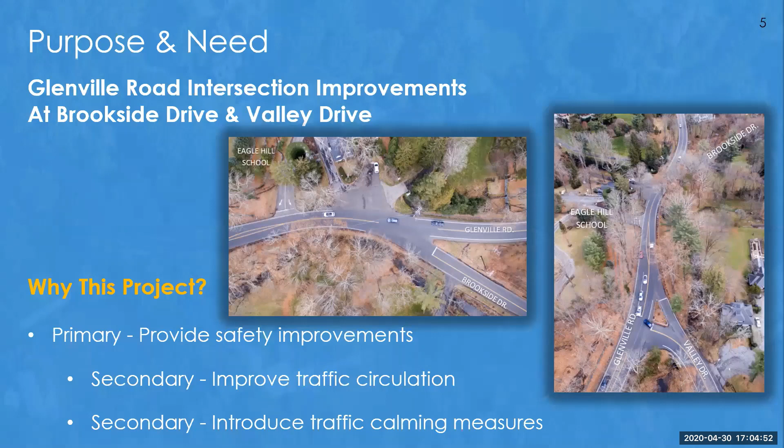There are several other project considerations that I'd like to touch on. While they will not be covered in detail at today's presentation, they will be covered in future presentations. The first being a potential realignment or relocation of Eagle Hill School's driveways to line up with one of the intersections. There is also a potential for a sidewalk leading to Lake Avenue.

There are other flood control initiatives within the project area that will be coordinated with this project. There are subsurface infrastructure and utility relocations and coordination that will have to go on as part of this project. There are environmental permitting procedures and town approvals that will have to be obtained, specifically the town's municipal improvement process and the town's inland wetland and watercourse agency approval process.

There may be some private property impacts for the proposed project. And finally, there are construction approach and sequencing items that will need to be addressed in the future. Again, all of these items, as others, will be addressed throughout the design process.

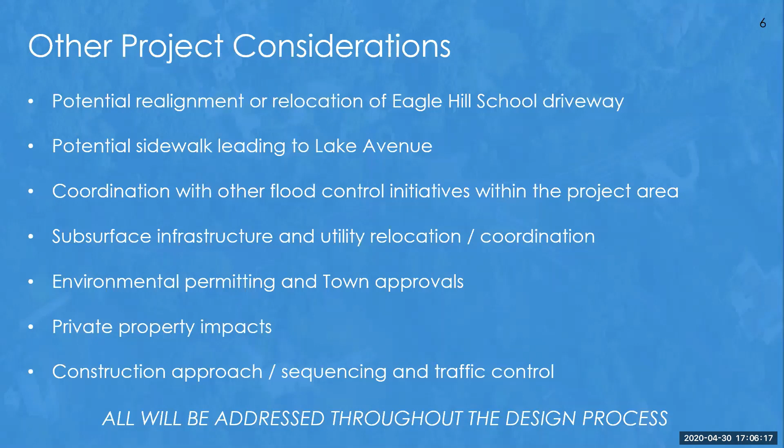At this point, I'd like to hand the presentation over to our design consultants from Stantec Consulting Services. Thank you, Jason. I'm Kent Gannon, project manager and civil engineer at Stantec. As Jason said, we are hired by the town as the consulting engineers for this project. I'll be running through the majority of the presentation with some help from one of my colleagues, Chris Mojica.

You'll hear from Chris a little later as we get into more detail discussing traffic within the project corridor.

Before we really get deeper into the presentation, I think it's important to reiterate some of the points Jason has made. Notably, we are still very early in the project development process. This is what we would consider the first phase, or the feasibility phase, of the project's evolution. So while true, we have studied the project corridor and developed some conceptual design options, which we'll present later, there's still a lot of work and decisions that will be made during any subsequent phases, and especially once we've progressed into the actual detailed design process.

So please keep all that in mind during the presentation, and especially when we open up the public comment portion of tonight's agenda. We certainly do our best to answer all questions, but try as we might, we may not have every answer, or at least every answer in the detail you're looking for at this early stage of the project.

Last point before we move on, please bear with us as well as we make our way through the presentation. I apologize in advance if I skip too many slides by accident or my mouse makes too many appearances on your screen. I think we're all adapting to a new way of doing things, and especially when it comes to presenting these types of projects to the public. So with that said, let's jump back into the project.

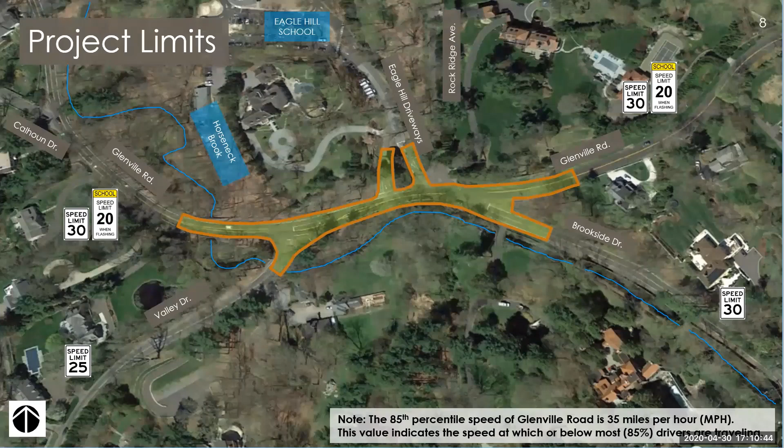We also have speed data available for Glenville Road, and the data tells us the 85th percentile speed for the road is 35 miles per hour. The 85th percentile speed is a typical value referenced and often used in engineering studies, indicating the speed at which 85% of drivers are at or below. So along Glenville Road, it can be expected that 85% of vehicles are traveling at or below 35 miles per hour.

Now that we've given a brief overview of the project corridor limits, here's a look at the three intersections we focused our traffic analysis on when evaluating improvements. These three intersections will be discussed and referenced in the next few slides, and again once we get further into the presentation with more detail regarding improvement options and traffic operations.

Reading off the intersections from west to east, left to right on your screen: we have Glenville Road at Valley Drive, Glenville Road at the Eagle Hill School driveway, and Glenville Road at Brookside Drive.

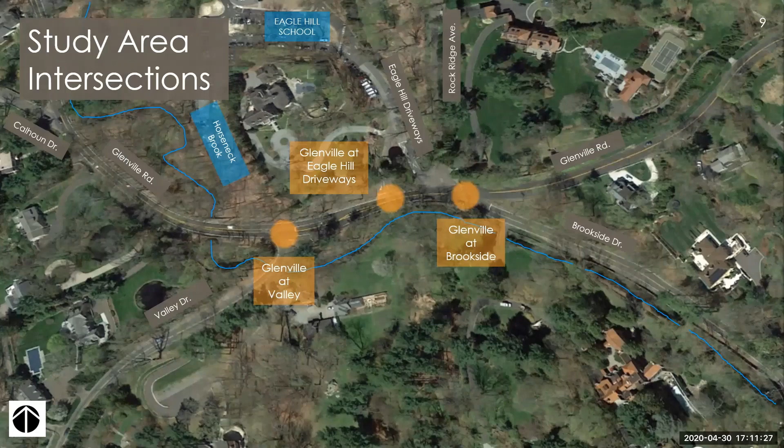The next few slides will further focus on existing conditions and feature the conditions of the existing intersections I listed previously. We'll work our way through the corridor west to east with a couple of existing conditions photographs for each. I'm sure most of you are familiar with this project area, but hopefully this will help jog your memory if needed.

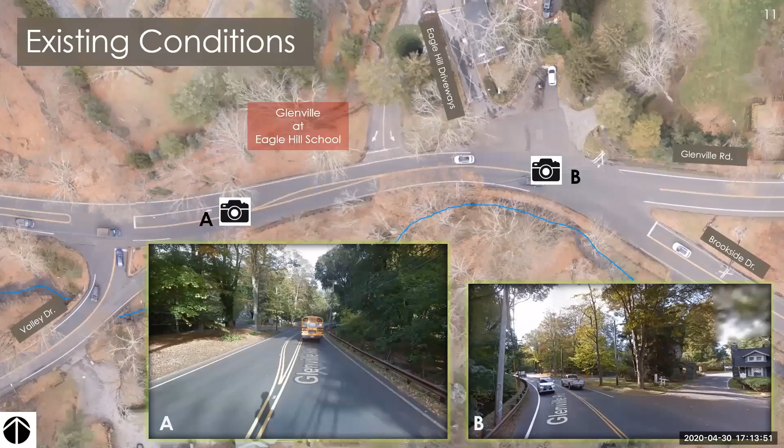The background aerial on this slide also gives a nice focus picture of the study area with turn lanes, stop bars, driveways, and the road striping clearly visible.

Now we've gotten into the crash history along Glenville Road with this slide. Jason mentioned earlier that providing safety improvements was one of the primary goals of the project. Therefore, this slide is important to give a quick glimpse into the crash history between 2016 and 2018, the latest 3-year window that crash data is available. So again, this does not represent any crashes during 2019, but this is the best data we have on hand.

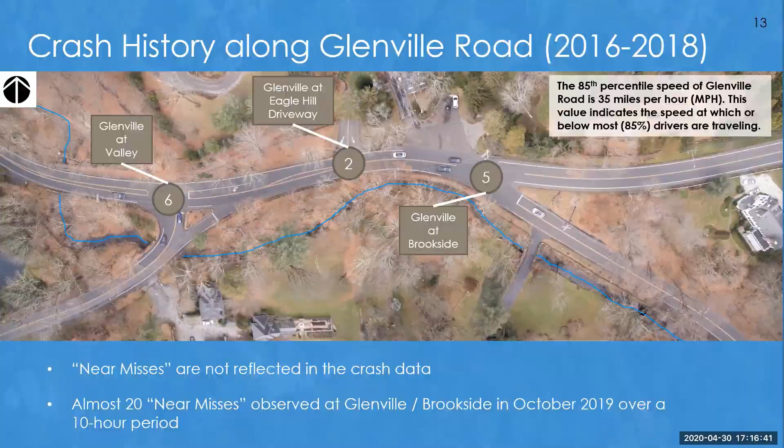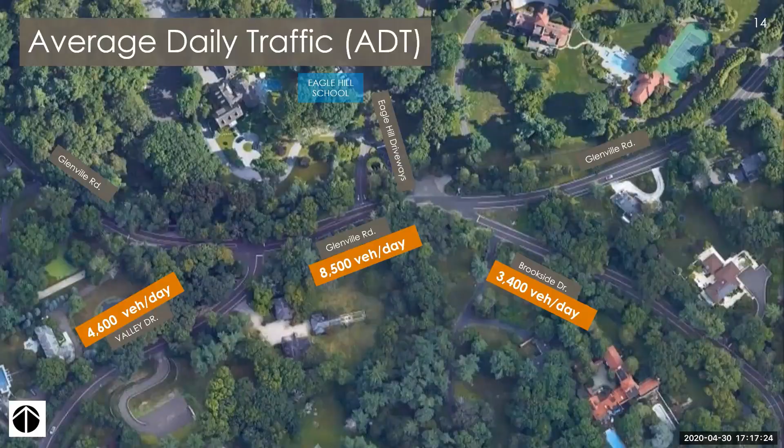It's worth noting we also evaluated a no-build option, which will be reviewed when we get into the traffic operations portion of the presentation. The no-build is also used as a basis of comparison when we evaluate the proposed improvements in a number of categories. So just quickly reading off the options.

Option 1: realignment and reconfiguration of Brookside Drive at Glenville Road. Option 2: signalization at Valley Drive and Brookside Drive intersections. Option 3: roundabouts at Valley Drive and Brookside Drive intersections. And finally, option 4: realignment of Brookside Drive at Glenville Road and a roundabout at Valley Drive. We also refer to this as the hybrid of option 1 and option 3, and I think when we show the plan, you'll see why it's referred to this way.

So option 1, this is the realignment reconfiguration of Brookside Drive at Glenville Road. Option 1 focused mainly on improvements at the Brookside Drive and Glenville Road intersection, mainly the changes tied to teeing up the Brookside Drive approach to Glenville to remove the dramatic skew currently present.

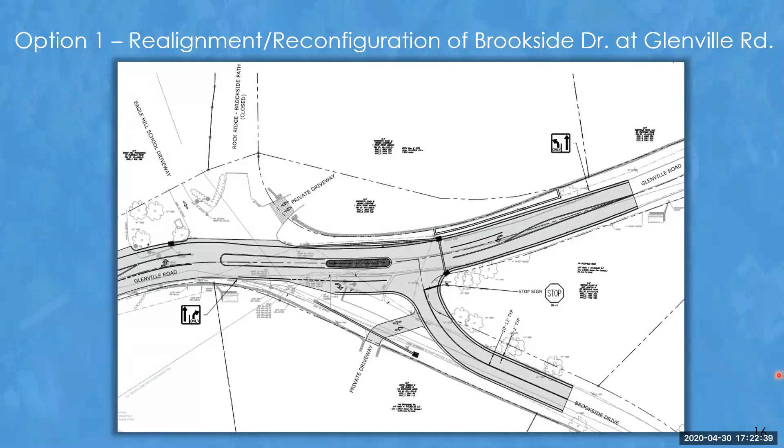The next option we want to discuss is signalization. This second option evaluated traffic operations at the study intersection when placing traffic signals at both the Valley and Brookside intersections with Glenville.

With this approach, the Valley Drive intersection geometry would be mostly unchanged, with the improvements mainly consisting of new traffic signal equipment and minor striping. However, we would anticipate realigning the Brookside junction at Glenville to create more traditional signalized intersection geometry, very similar to option 1, only with a traffic signal versus a T intersection with stop control.

Something I'd like to mention here as well is that we didn't just decide to throw traffic signals in as an option, run through a simulation, and see what happens on the back end. There is an engineered approach to evaluating intersections and whether signals are warranted.

So we completed that study, and the analysis did determine that signals are warranted at both the Brookside and Valley intersections with Glenville Road. With that said, even if signals are justified by a warrant analysis, it doesn't always mean it's the best option for that location, as the installation of a signal may actually result in increased vehicular delay or even increases in certain crash types, such as rear end collisions.

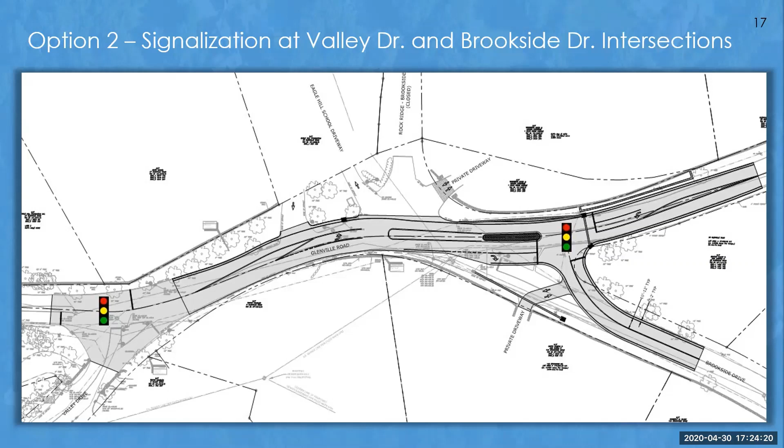Now onto option 3. This is the roundabout at Valley Drive and Brookside Drive intersections. This third option transforms the way both the Valley and Brookside Drive intersections operate. This option would replace both existing unsignalized intersections with roundabouts.

Each roundabout would be 3-legged and designed to fit within the existing right-of-way area, with the goal of eliminating the private property impacts that might be present with the other options, and also reutilizing as much of the current pavement structure and infrastructure as possible. As with all options, we anticipate the installation of new catch basins and manholes as necessary to collect stormwater runoff and tie into the existing storm sewer network.

These roundabouts would be designed to Connecticut DOT and FHWA standards, with a fire truck and school bus as the design vehicle. In other words, the roundabouts, while not very large, would still allow emergency vehicles and school buses to effectively operate and maneuver through the intersection.

This style of intersection also provides a yield, entry, low speed, free flowing approach, and when designed properly, can help provide a measure of traffic calming through the roadway corridor.

In addition, the roundabout can also provide opportunities for gateway or other aesthetic improvements, and these can be added to the roundabout's central island. We don't have any landscape improvements shown in this conceptual design, but these central islands can be landscaped if that's something that's desired.

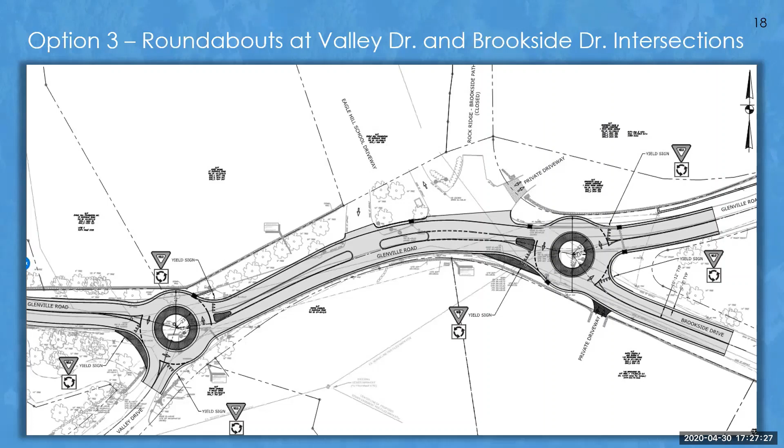And for those of you who would like to see an in-town example, an existing roundabout at the intersection of Havemeyer Lane and Northridge Road is shown here. This is a good example of a roundabout with a comparable size and layout to some degree for what you could expect at the two intersections within our project corridor.

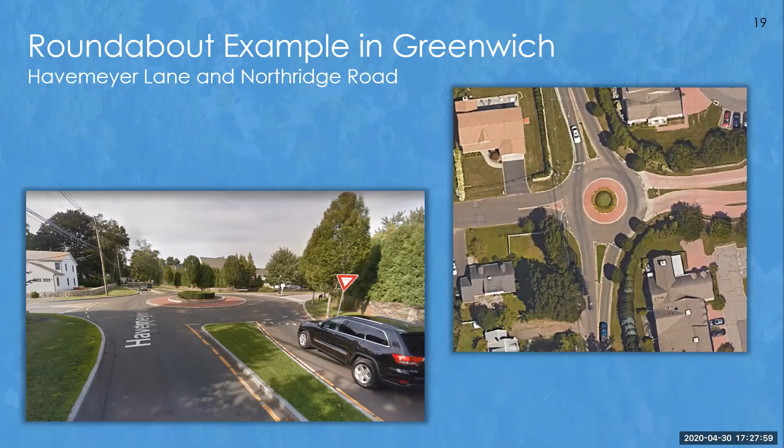The last option we evaluated is what we refer to as the hybrid option. This option takes portions of option 1 and option 3 to create a fourth hybrid approach. The option has the realignment of Brookside Drive at Glenville Road, first shown in option 1, and it also has the roundabout at Valley Drive and Glenville Road presented in option 3. All the previous points discussed with option 1 and 3 still hold true for this hybrid option.

The option provides traffic calming, gives opportunities for green infrastructure and/or landscape additions, but may also require some grading and earthwork, utility relocations, and right-of-way acquisition to accommodate the changes at the Brookside Drive approach to Glenville Road.

One of the things I neglected to mention in the other options is the extra space, or lane width, or median area, if you call it that, created around the Eagle Hill School entrances. That's really this area here. The options, either through the addition of a turn lane or the implementation of a roundabout, create this extra space in this median type area, which can be used as either a turn lane or refuge space for vehicles turning into the Eagle Hill School entrance. This is beneficial as it allows a continued flow of traffic eastbound through the project corridor.

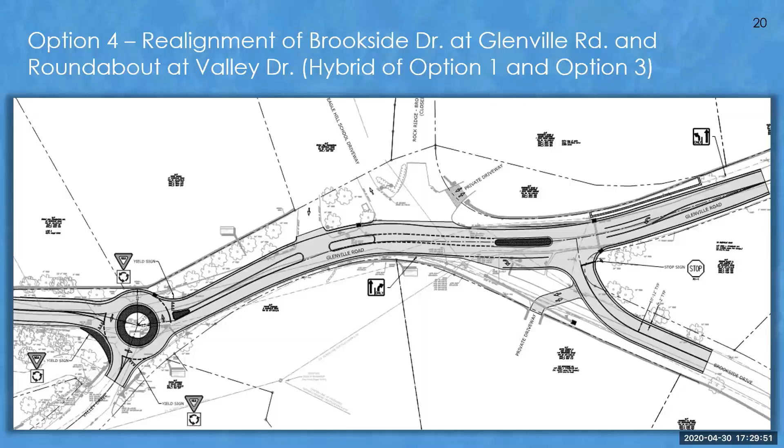I'm pretty sure I hit upon everything I wanted to talk about. So at this point, I'm going to turn it over to my colleague, Chris Mojica, and he'll discuss how we evaluated the traffic impact of each of these discussed options. Take it away, Chris, if you're ready.

Sure, thanks, Kent. I want to spend a few minutes just talking about traffic operations, and this discussion's slightly different in that Kent really focused on, from a traffic perspective, a lot of the safety issues. He touched upon the fact that the 85th percentile speed, the speed at which most drivers are traveling, is 35 miles an hour, which is above the posted speed limits of the area. He talked about the crash history, but I really want to spend a few minutes just focusing solely on the overall traffic operations. The goal here, we know, Jason mentioned that the purpose of the project is really to improve safety, but we really just want to assure that we are maintaining traffic operations, or improving where possible, as part of these safety improvements. From a traffic perspective, we did look at existing conditions, and Kent mentioned we looked at data from October 2019, and I'll go through that a little bit in a second.

From an evaluation perspective, because this is a design project, we're looking ahead into the future, specifically 20 years into the future, into the year 2039. The reason we're doing that is to be sure that anything we decide to do, if we move ahead with any of these improvement options, the operations and safety hold true for another 20 years. We don't want to put something in now that won't work in 5 to 10 years - it's not a useful investment.

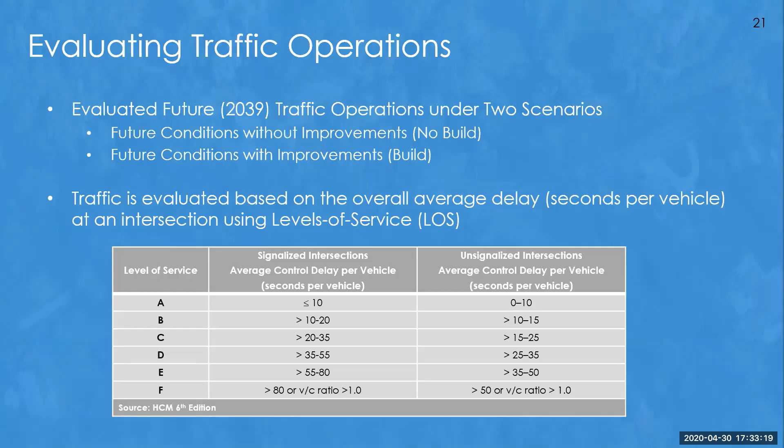One thing I want to note is there was a police officer at the Eagle Hill School driveway intersection for about 20 minutes in the afternoon. The traffic results here don't incorporate the presence of a police officer, because the traffic modeling can't replicate an officer maintaining traffic flow at the intersection. When you have an officer there, they have full autonomy to decide how traffic will flow - they can hold up Glenville Road for 2 to 3 minutes, or hold up the Eagle Hill School driveway for 2 to 3 minutes at their discretion, and that's not something we can really model. So the results here just take into account the traffic volumes handled during this period, and that's what we'll use as the benchmark to evaluate conditions as we move ahead.

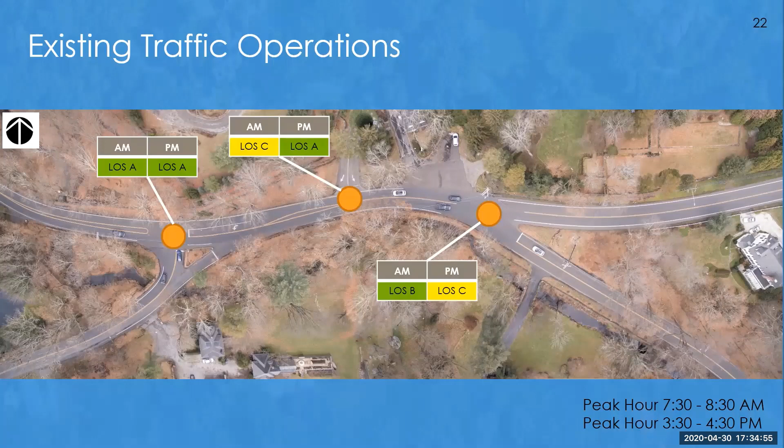Go to the next slide.

So when we say growth, we're assuming a total of 10% growth over a 20-year period, just to give you an idea. That's based on recommended guidance for traffic growth in the area.

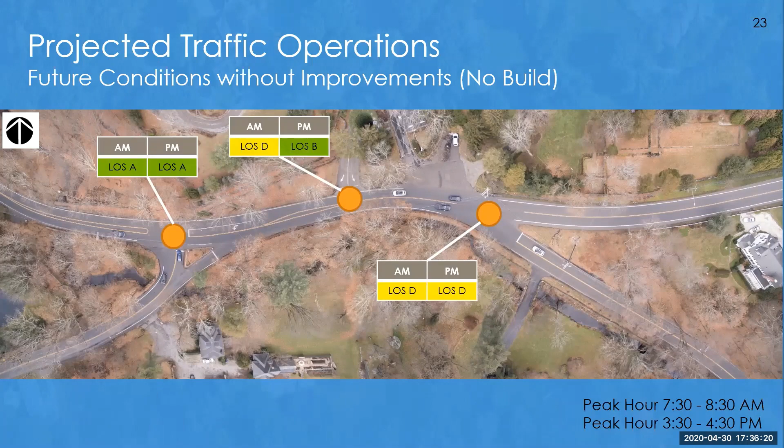...and the afternoon peak hour, we looked at the traffic operations for all of the different options. So we have what we call the no build, or do nothing, scenario, and then each of the 4 options that Kent walked you through a few minutes ago.

Just to recap: option 1 is reconfiguring the T intersection at Brookside and Glenville. Option 2 is adding signals at Glenville, Brookside, and Valley. Option 3 is providing roundabouts along Glenville, at Brookside and Valley. Option 4 is the hybrid concept Kent talked about, where we provide a roundabout along Glenville at Valley, and also reconfigure the T intersection along Glenville Road at Brookside.

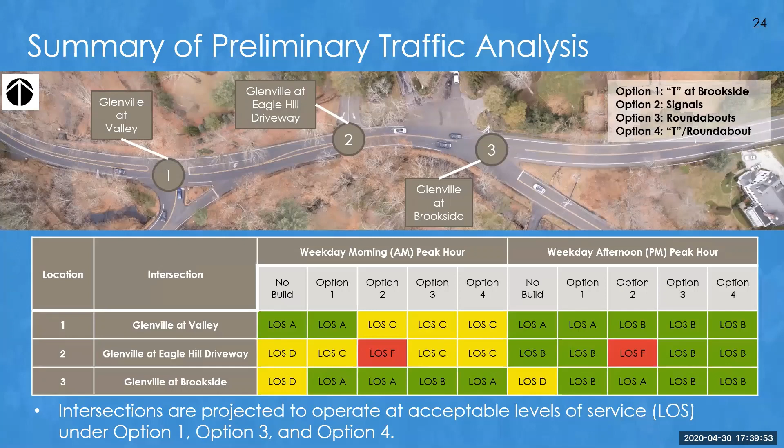Yes, yes, good, good. Well, I heard a moment ago from my neighbors, the Bennetts, who said they've been here for 35 years, and I've been here about 35 also. Hi there, we haven't seen each other for 25 years, but it's fun to be meeting here today.

I kind of lean in favor of what they said, which is I think roundabouts can be really engaging, a nice, pleasant way to encounter changes in the roadway. I also think the roundabout suggested down by the new entryway for Eagle Hill School could reduce a lot of the traffic that happens right now at the current entryway, which is really horrendous and impacts us pretty directly. So I like the sound of all of this stuff.

The one query I have is that right now, if you imagine coming into Eagle Hill School, there's a little stone coach house that you pass, but right in front of that coach house there's perhaps a 30 by 200 foot unused paved rectangle. Sometimes the police stand there just watching people going past, but it's never seemed a very functional use of space. I wonder, would this have any impact on that strange little dead zone of paved highway?

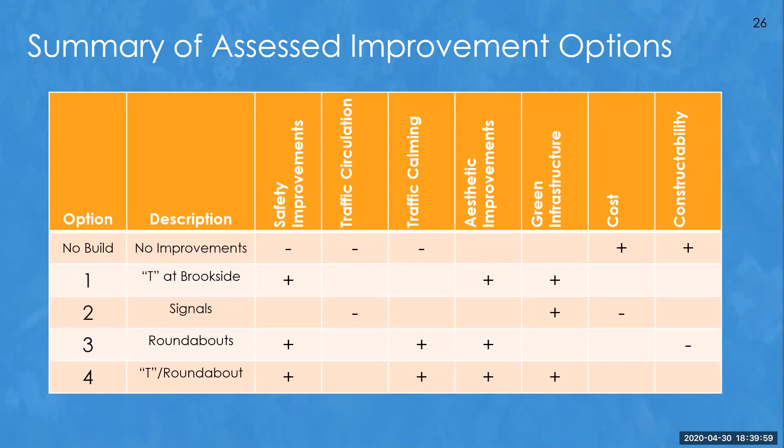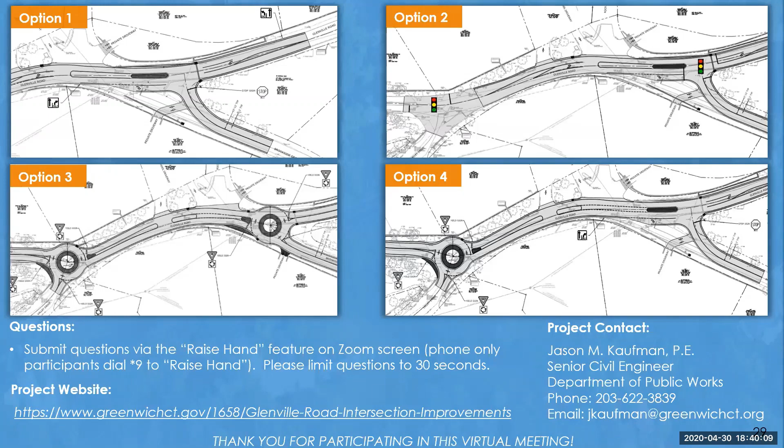I'll wrap it up if Kent, do you want to go back to the slide before this with my information on there? Yep, yes. So again, I'm Jason Kaufman, a senior civil engineer with the Department of Public Works. We'll be managing this project for the town. You see listed the project website, which has additional information, and also will have this presentation posted in the near future. My email address and phone number are listed there as well.